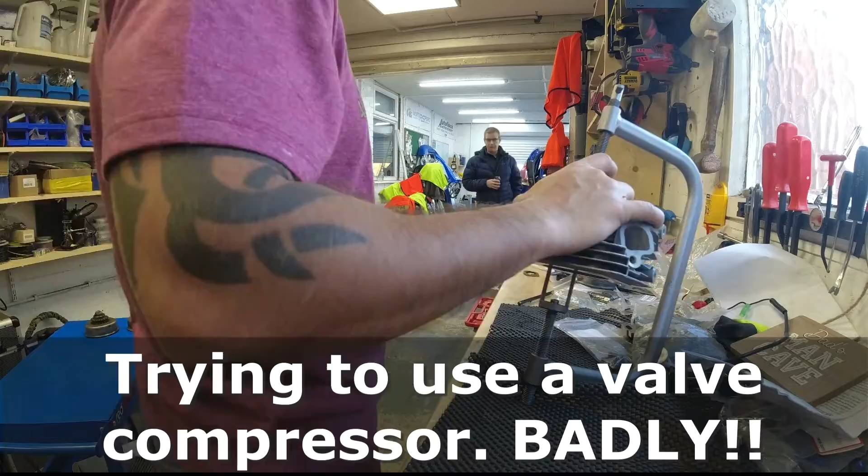Right, so finally I've got the collets on with the spring caps. The valves are all installed, but I'll tell you what, that was a mission for me. Even using proper spring compressors, I really did struggle. There's a knack to it which I've yet to find. It's as if you do a little bit of fiddling with it, and all of a sudden the collets just fall into place, and then you can release the spring compressor and they're done. So if you want to see a vlog on how to do that, look at someone else's video, because I cannot offer any decent advice on that because I struggled. But yeah, that's the hardest job done now. Time to get it onto the block and let's get it built up.

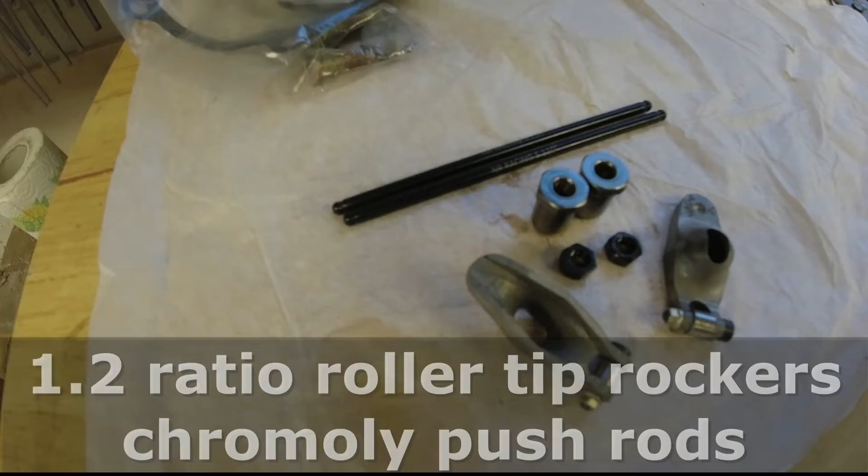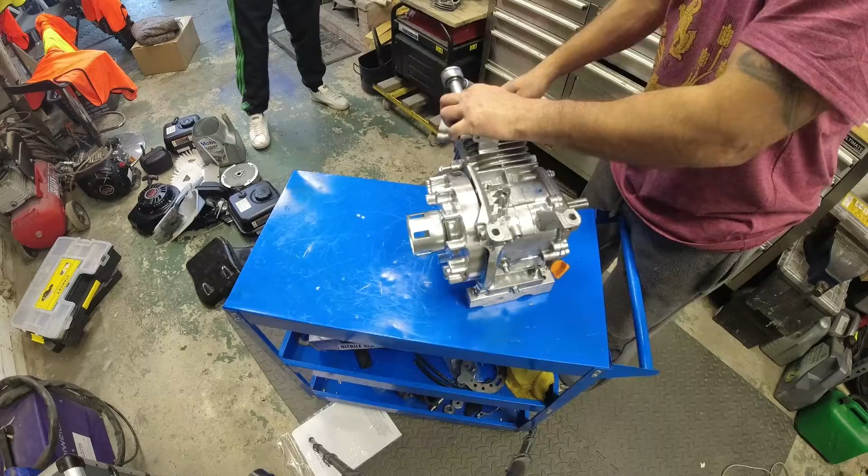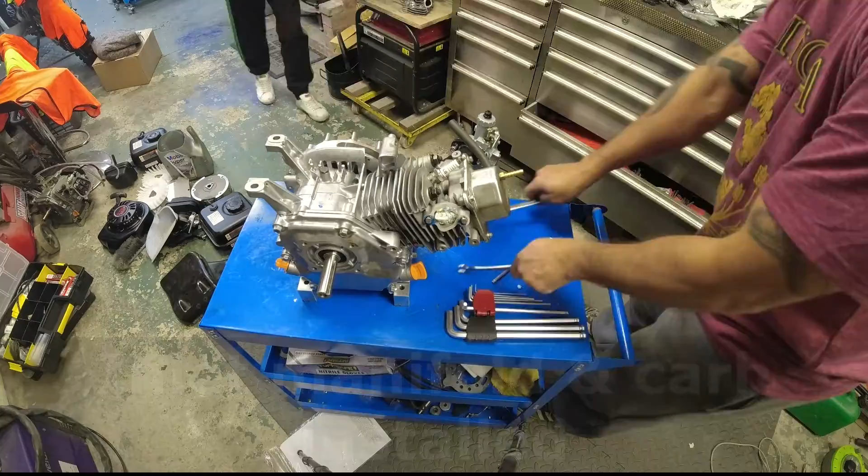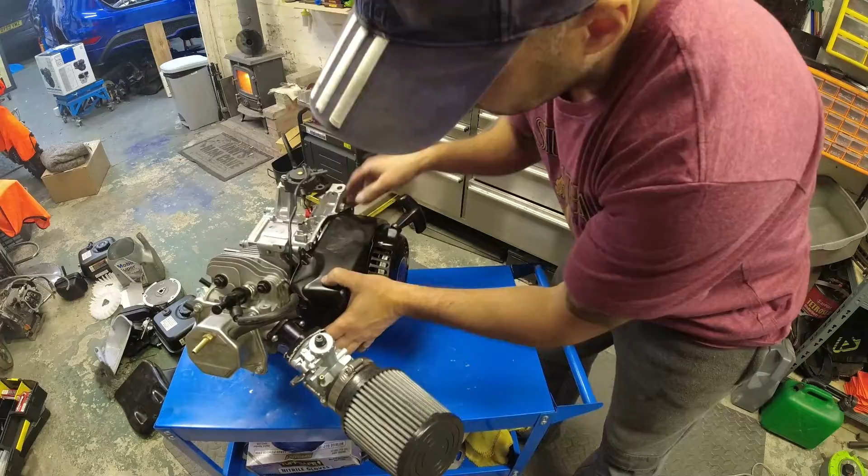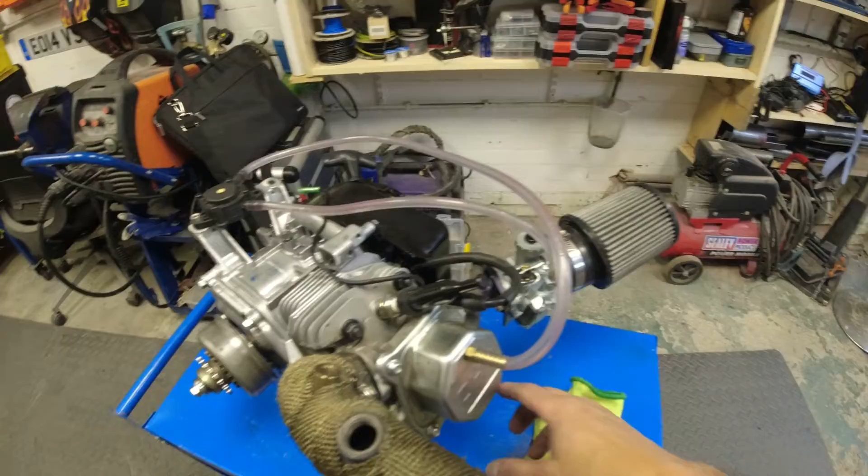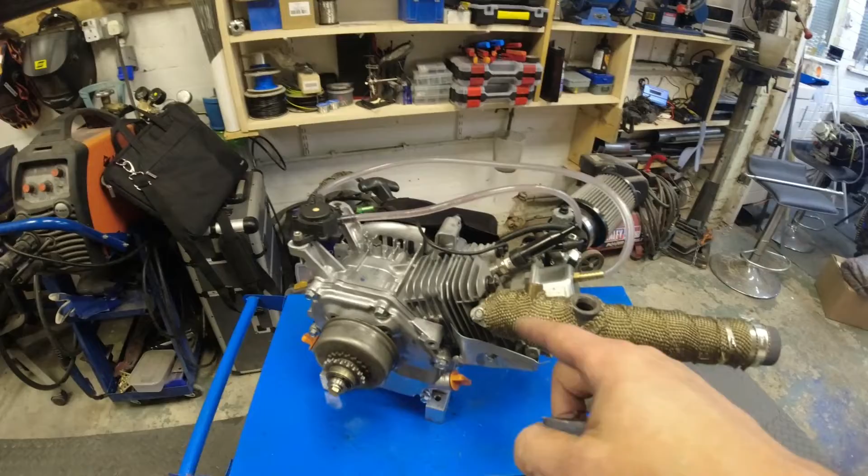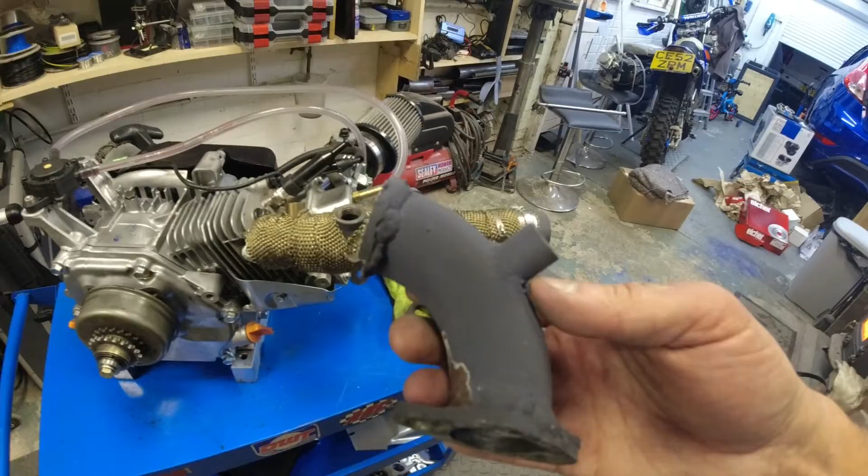Right, so that's it, full engine, all built, top and bottom. We've got the carb on, all the inlet manifolds, everything's torqued down as it should. I've got the cooling duct all installed. But I had to fabricate the exhaust manifold - this is the exhaust header I use for the dyno, but I normally use bolts in the head, and I've moved over to studs on these heads, which meant the nut wouldn't spin around. So I tried to grind it away and I went straight through the exhaust. And that's actually ceramic coated, which is not the cheapest of coatings. Anyway, I'm still going to keep it just in case, it's worth a few quid. So what I've had to do is fabricate a new exhaust. You can see the old exhaust is here, it stops about there, then this is like a fresh elbow. And I've just ground this one away so I can fit these bolts on. Just to give you a bit of background, this exhaust got a boss here for the oxygen sensor, which tells me the air-fuel ratio, and I've got another boss here for a thermocouple, which will tell me the exhaust gas temperature.

We'll pump on, get some fluids in there, get some oil in there. We're going to put 450ml of the Putoline in, like I did before. I'm going to bolt it down on the dyno. It's got some normal 95 RON fuel. Fire it up, hopefully it'll fire up relatively easy, then just let it tick over. Give it a good 10 minutes of ticking over, maybe 15. Then shut it down, drop the oil, and I'll expect to see a lot of metallic in the oil from the break-in process. Put another 450ml in, back on the dyno. Then I'll start giving it a bit of load, just some gentle runs with some load against the flywheel on the inertia wheel on the dyno. Do that for another 10 minutes, drop the oil again, and then back on the dyno, warm it up, and let's see what it does. Exciting times, let's see what happens.

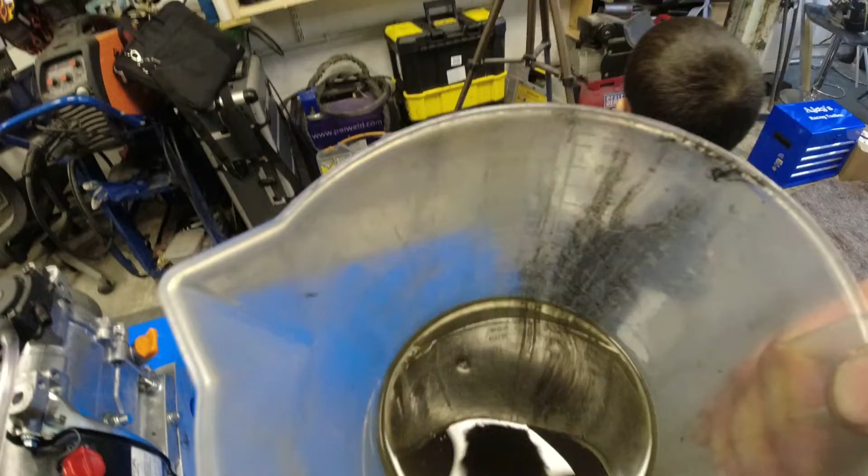Right, so I've just done the final oil change. You can see there's lots of metallic deposits in there, shining away. That's a lot of metal just from adjacent pieces breaking in. That's totally normal, so don't be alarmed if you see lots of shiny metal in your oil when you do the change. That's just part of the process.

The key to these engines is frequent oil changes. As a rule, I tend to do mine about every 3 outings. I'll just drop the oil - in the UK it costs us £9 to do both engines, it's nothing, and it's good for the engines to keep fresh oil in there. There's no filters or anything, so any metal in there can damage the bearings or whatever. So just do frequent oil changes.

But this is the bit we've all been waiting for. Put some fresh oil in it again, get it back on the dyno, put the sensors all on it, and let's see what power it's doing. I'm hoping to see 15 horse - if I get that, I've got my 30 horsepower cart with 2 engines. Any less and we'll have to rethink and play about with it, any more will be a great starting point. But it'd be nice to see 15 horse straight off the bat. So let's get it on the dyno.

Right, not sure if you can hear me, just move out of the way. The engine's getting warm now, final oil change, it's all fitted back on the dyno, all the sensors are hooked up. We're going to give it another couple of minutes, then do some power runs - 3 runs back to back, and I'll look at the data afterwards. A few swigs of this, let's see how we get on. Fingers crossed we should be well in double figures, 15 horsepower would be really good. But it does what it does, let's move on from there and get it running.

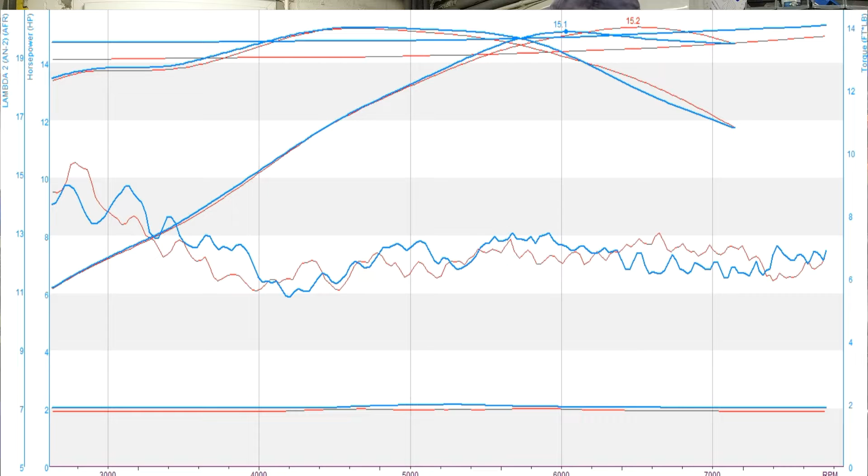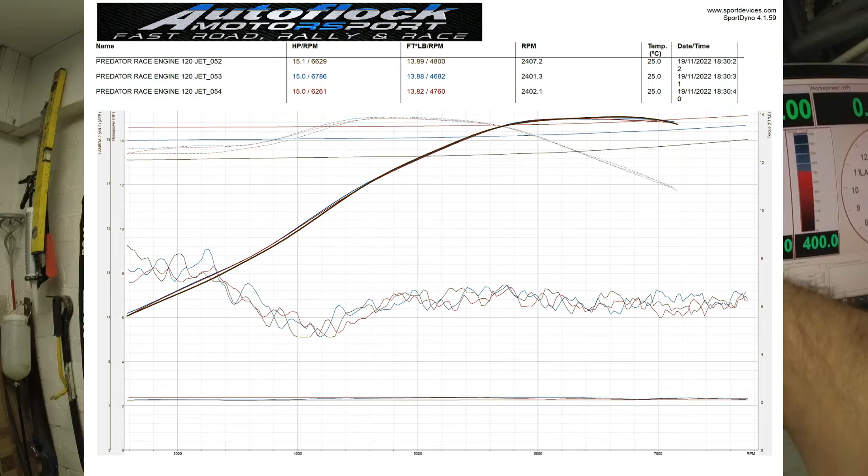Right, that's a bit of a result. As you've seen on the graph, I'm really impressed. We've done 3 runs back to back and the graphs are identical - the torque is beautiful, nice and straight, very linear. The power curve just gets to 4 grand and climbs and climbs and climbs. Up to 6 grand we got 15 horsepower - 15.1, 15 - just look at the figures, so consistent.

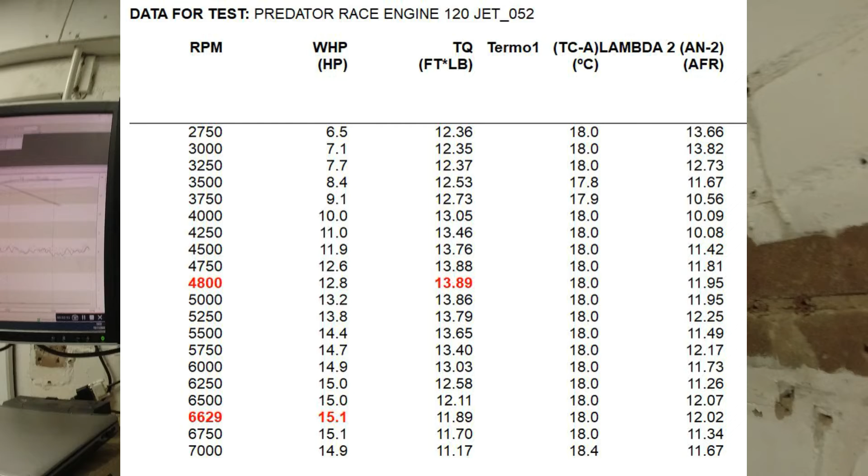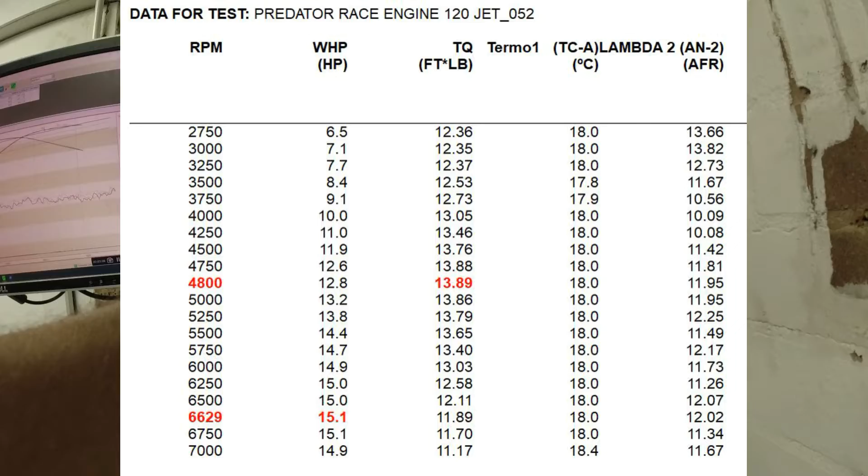I've not actually looked at the AFRs yet. Let's get a better look at the data - there we go, we've got the AFRs up now. They look a bit on the rich side. We started off as it jumps off the pilot jet onto the main jet from 13, drops to mid 12s - a bit of a glitch there with the 13. Straight to 12, 11, 10, 10, 10, 11 for a bit, a little shot there with 12, 11s and 10. So I think I can lean that out.

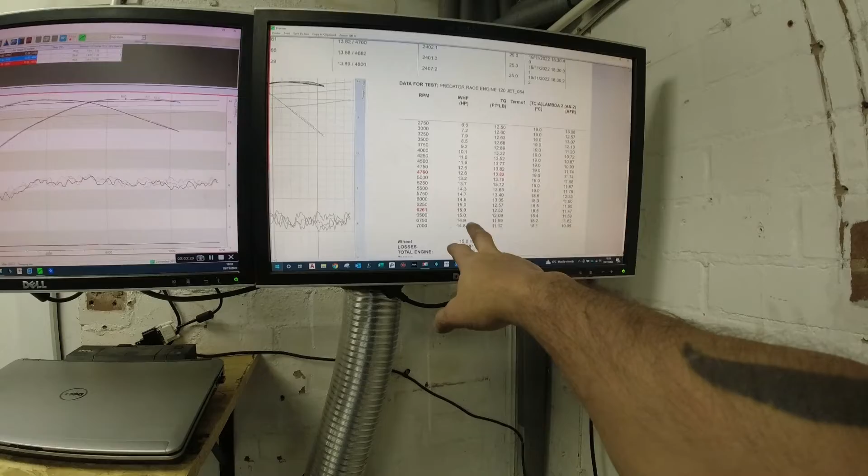So that's with the 120 jet - I think I'm going to go for a 115 jet and see what that's like. But you can see straight away at 4 grand it's up to 10 horse, same as the old Subaru engines, and it just climbs from there. At 6.2 is when it's making peak, at 15 dead. That graph is just really, really good - a good benchmark to start with.

So I'm thinking I'll call it a day now because it's 6:30 on a Saturday afternoon, early evening, and I'm doing this all at my own garage at home, so I don't want to be waking up and annoying the neighbours. So I think that's enough for today. After work tomorrow I'm gonna have a couple of beers and we'll change the jet, see how that affects the AFRs, then start playing about with different plugs and messing about to see if we can increase this power. But straight away now we've got the 30 horsepower Pro cart - if I can build another engine like this, that's 30 horsepower, which will be lightning on track. But let's see if we can get some more.

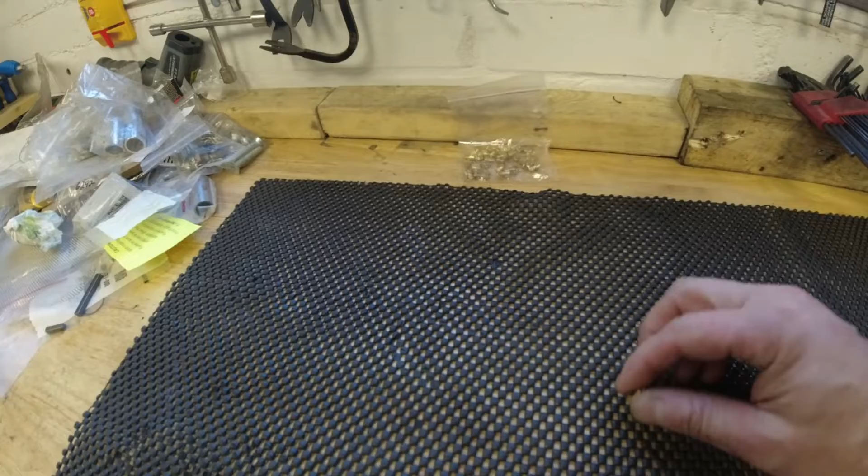I'll report back tomorrow. Okay, so it's the following day. As I discussed yesterday, I want to try and change the jet, change the fueling a bit. I've got a couple of jets here, I've got loads. I'm concentrating on - I can't really tell on the text - I've got a 110 there, and I'm hoping this is the 115. It's got a 5 on it but I can't make the rest of the text out, it's been worn away. I can't find another 115, so I'm hoping this is the one. So I'm just going to drain the fuel out the bowl of the carburettor, get this installed into the carb, fire it up, get it warmed up, and do another couple of pulls and see how the graph changes. So let's do that.

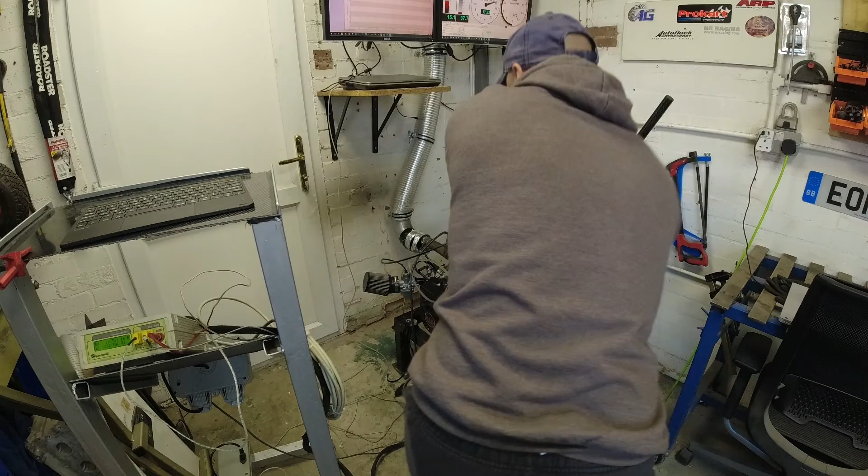Right, so I've just put the graphs up now of the video, but for some reason it didn't record, so there's no sound with it. But it's done the same power again really, 15.1, 15.2, 15.0.

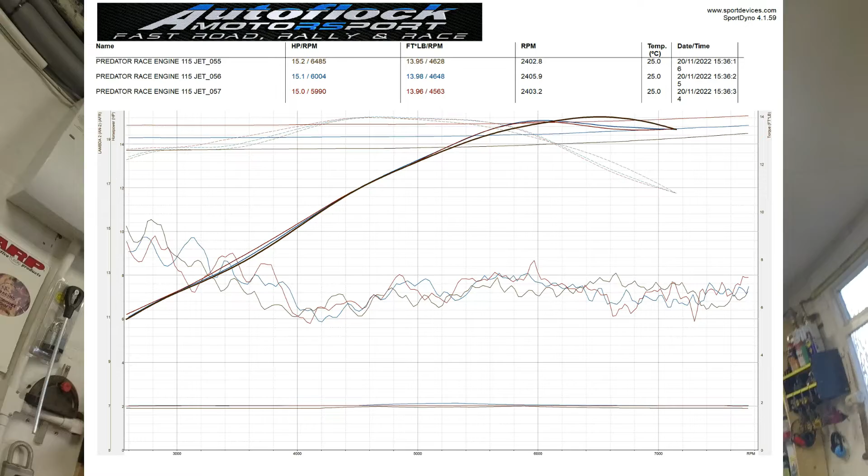The AFRs are still on the rich side. Coming onto the main jet, it's like late 10s, early 11s, mid 12s, then back into the 11s. So I'm going to take that jet out and put a 110 in and see how we get on with that, because I think I can run this a bit lean.

Ideally I want to be early 13s, late 12s. Some people might disagree with that, but this is just what I'm going to try and see how it runs. So take this jet out, put the 110 in, and let's get it run up. Let's get on with it.

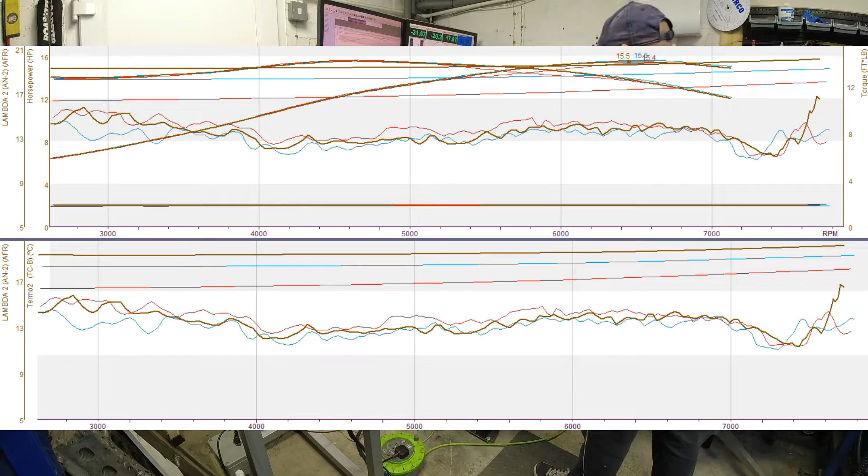Right, okay, so that was very interesting. We put the 110 jet on it, and it's changed things quite a bit. The graph is still superb, really linear. AFRs have gone a little bit lean towards the top end, with a dip into the late 13s.

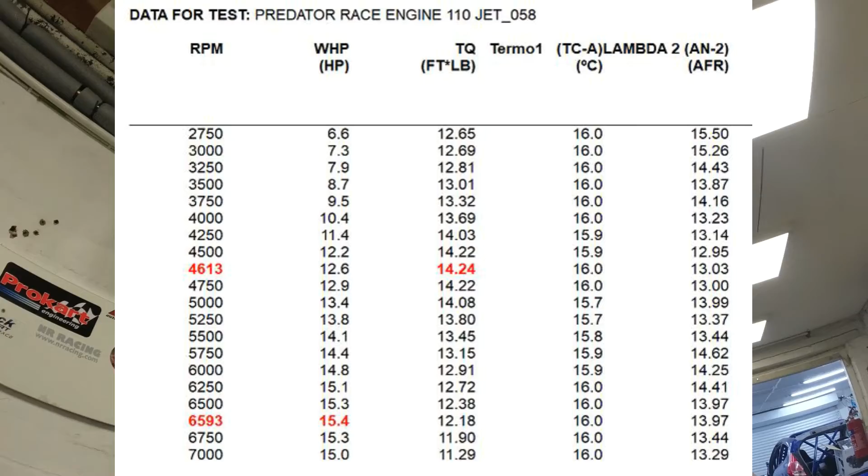7 grand is 13.7 to 1. At 6.5 grand it was 14.1, that's a bit too lean for what I want. But the power has gone from 15 to 15.5 - I got 15.4 in the first run, then 15.6, 15.5. Torque respectively is the same - 14.2, 14.18, 14.15. It's just so consistent. That is some good power.

What I'm going to try now is, instead of changing the jet, work on the slider - you've got a needle there which has got different adjustments on it. I think it's got 5 adjustments, and I think it's set as standard. I haven't even checked this on the middle one. So what I'm going to try is knock it down a notch.

I want to richen it up, so knock it down one, which means it'll lift up higher, allowing more fuel through the emulsion, to make it a little bit richer. That might sort out the top end. It's only a slight bit of adjustment - I don't want to do too much and lose the power, because I'm really happy with the 15.5.

I've not even started playing about with spark plugs or timing yet - it's purely jetting so far. So I'm going to get this needle sorted now, do another 3 runs, and see what we get. Let's keep going.

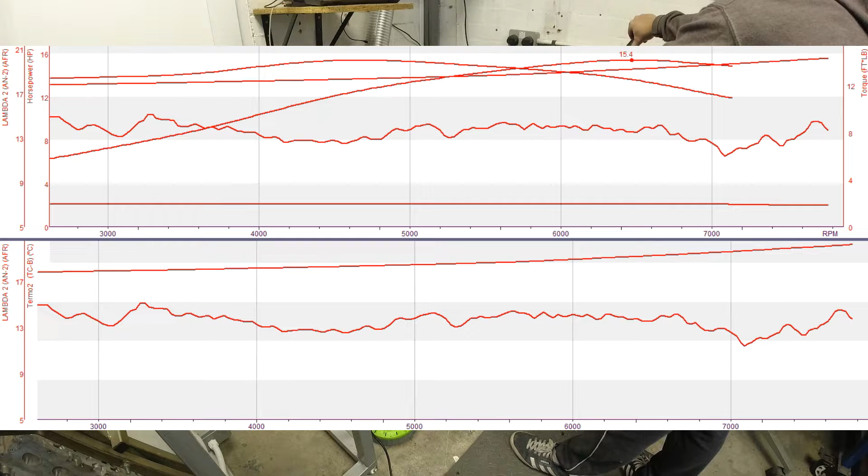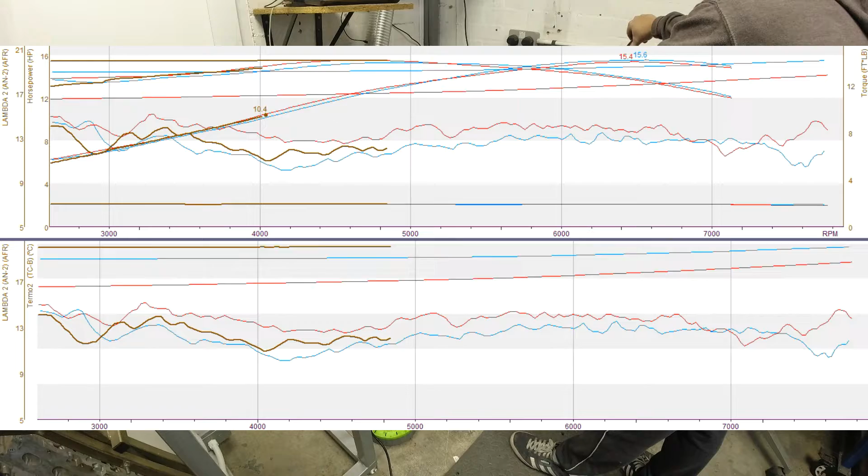Right, I think we've definitely cracked it now. Just by that one little adjustment, it's changed the AFRs completely. Power and torque hasn't changed - if anything it's been a bit more steady.

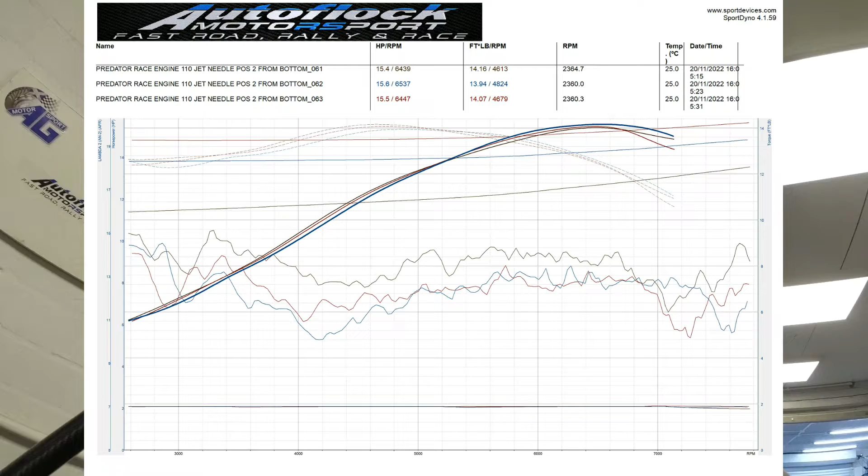So it's 15.6, 15.5, 15.4. Torque, bang on the 14 mark, 14 foot-pound. But the AFRs are just perfect - they're late 12s, and just as you get towards 7,000 it drops into the late 11s, which is super safe.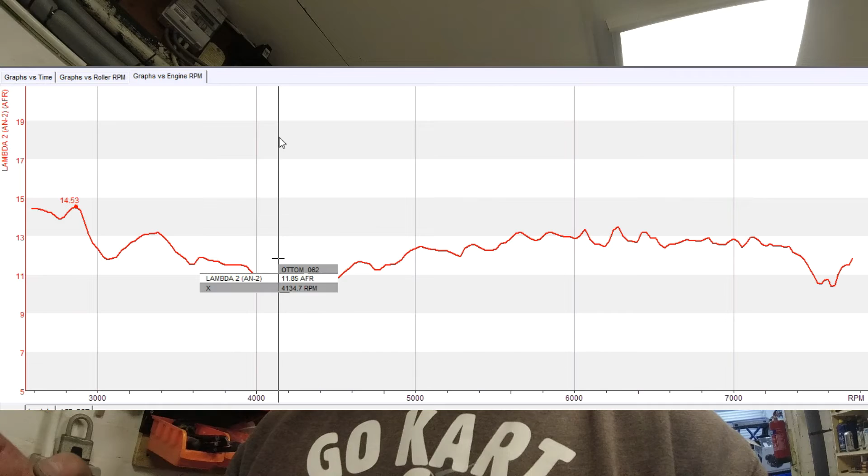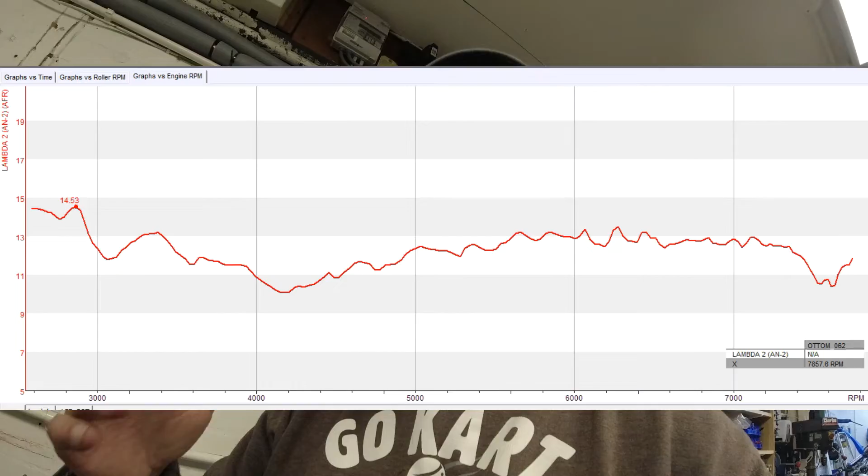What you've got to remember is I'm planning on making a ram air induction system for this. So when you're driving on track, there'll be more airflow, which should compensate for this extra fueling at the top end. We're hoping it will balance out, but there's no way of simulating that on a dyno because the air is static. I'm really happy with these AFRs.

When it goes into the main jet, it does not once dip into the 13s at all - it's just mid 12s to late 12s. I'm happy with that, at least I know it's mega safe, and I've not lost any power. EGTs have come down slightly too, so everyone's a winner on that.

In terms of a bolt-on kit, this is as far as I'm going to go in this vlog. I think next time we'll start playing about with the spark plug, try a few different ones, and see what power we can get from changing that. Then it'll be a case of getting it fitted to the kart and fabricating some new inlets.